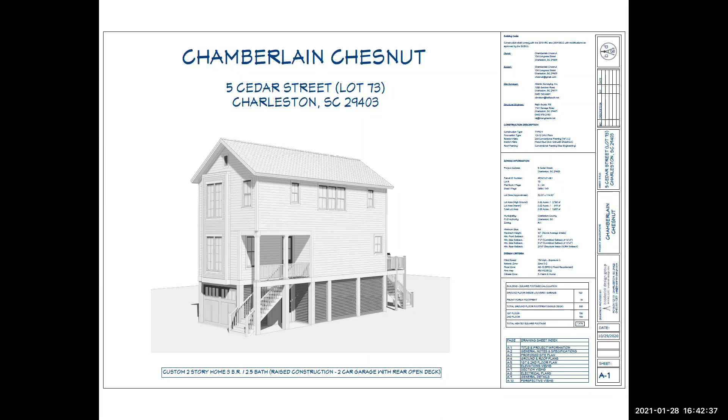Chamberlain, do you perhaps want to go through the slides with us? Sure, absolutely. Just tell me when to advance. You go ahead and advance.

So as you see, looking at the rear of the property, the marsh is all in the backyard, so there's that OCRM line. To the right of the property it says part of lot 74, City of Charleston. There's actually a large drainage canal that runs through that, so Lee Batchelder said that lot is rendered unbuildable. So my lot is actually the last buildable lot on the street. Everything around it is pretty much either vacant land, and there's about 25 townhomes across the street that are 2-story and have been flooding out. The neighbors are trying to band together to see if they can raise up the whole entire townhouse compound, because it floods so bad, about a foot deep in the street.

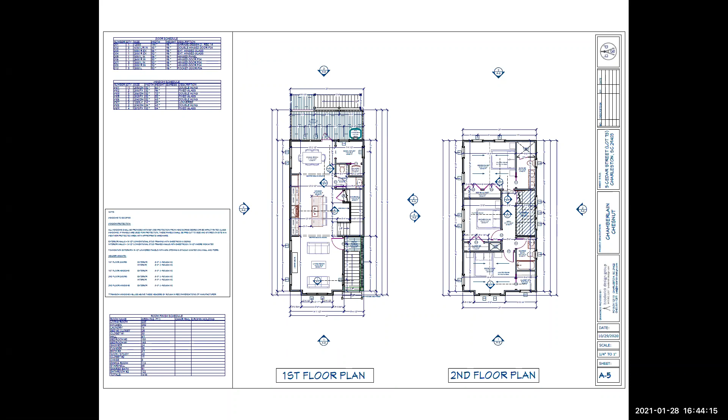So in the front elevation, I always think it's going to go with regular James Hardie plank, but I could always switch to an Artisan siding to give it the thicker look that the historic district would have. And I can go with the 5V roof or standing seam roof, whatever the BAR wants to see here. However, it would be the only house in the neighborhood with all these architectural details, because all the other homes don't have that, but I would be happy to do whatever you guys recommend. That's all I have for you.

Board members, do you all have any questions of the applicant at this point? I have one. Mr. Chesnut, can you just spell out for us the flood zone that you're in and the required first floor elevation? Yes, so it's currently AE 13.

My benchmark is set about 5 to 6 feet above grade at the telephone pole. So I already lose a full story with the flood zones. I have to be 2 feet above the base flood elevation. So the current just adopted flood zone is AE 13, correct? It's AE 13, yes, currently with the new maps. So your finished floor has to clear 15, correct? That's correct, yes. Thanks.

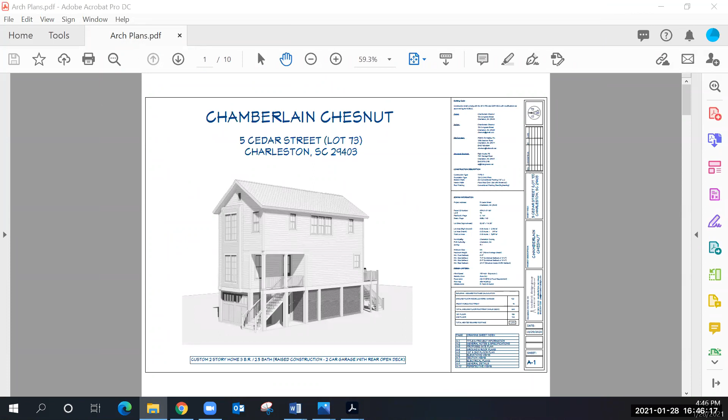Sorry, I'm pulling it up. It's on the elevations. I can't read it, but I'm going to tell you right now. Each floor height's only 9 feet with a 14-inch truss in between. So your garage level, that's a 7-foot garage door. So from grade to the bottom of the floor structure, it's going to be 9 feet 4 inches. To the first floor elevation will be 10 feet 8 inches. To the rooftop, it's going to be 37 feet 9 inches from grade, so just under 38 feet.

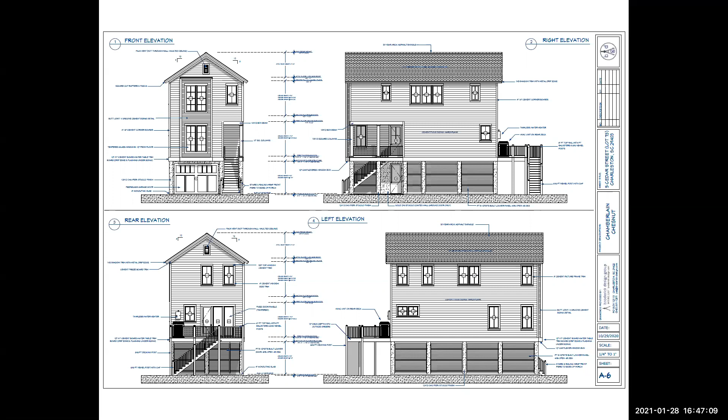Okay, so on the first habitable floor, what's the ceiling height? And then the second floor where the bedrooms are, what's the ceiling height? 9 feet and 9 feet as well. We tried to make this building as short as possible. Thank you.

There are no other board questions. We'll now hear from the public. I don't think we have any public comment. Okay, nope, we don't. No public comment, Kim? That's correct. Okay, now it's time to hear from staff.

We'll move on to city staff comments and their recommendation. We have several comments, but first, want to discuss this property is outside of the jurisdiction of the BAR. However, per zoning ordinance, this parcel must be reviewed by the BAR for the additional half story that's requested. This lot is a unique outlier in that due to the context of the street and the fact that half of the lot is undevelopable, we're in support of the request. It's important to note that the BAR does not believe this project meets the architectural merit test for any architectural elements, style, materials, or detailing, but rather the context of the lot makes it otherwise unreasonably undevelopable. This doesn't set precedent in the Old City District, the Old and Historic District, Landmark Corridor, Historic Corridor, or even the demolition purview, but only in the very unique situation that it presents.

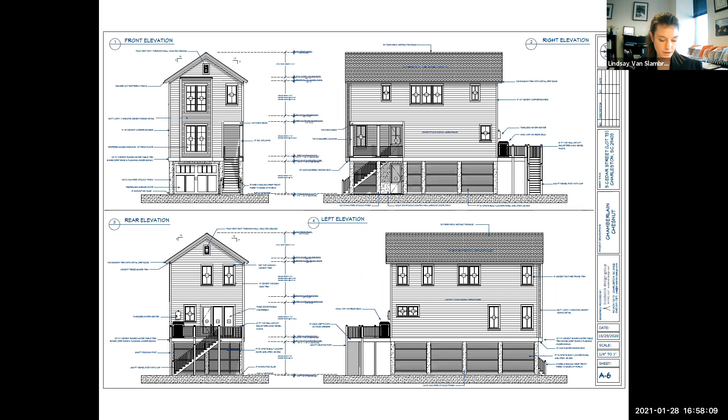All right, moving on. Agenda item number 3 has been deferred, so we'll move on to agenda item number 4, 250 Rutledge Avenue. And Kim, I'll move to you. Thank you.

Item number 4 is 250 Rutledge Avenue, requesting conceptual approval for a rear addition to an existing duplex. The house is a category number 4 in the Cannonborough-Elliotborough neighborhood, circa 1895, in the Old City District.

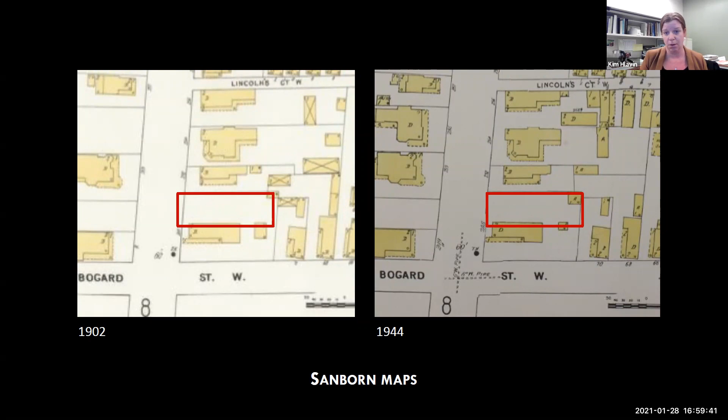You can see that the piazza is facing the wrong side, which gave me pause. Here's another image, a 1980s image, not quite sure how old, same era. In doing Sanborn research, I noticed that the building is not there in 1902, or in 1944, or 1955.

With some help from Kevin Eberly and some sleuthing, we determined that it was moved to the site in the 1960s, moved from further up on Rutledge at 501 Rutledge for the construction of the crosstown. So it was 277 Rutledge before the address was changed. 501 Rutledge was the last address before the crosstown came in.

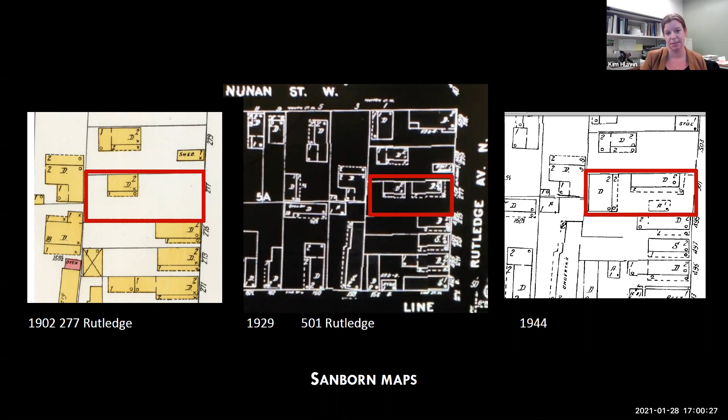You can see it there in 1929 and 1944, it had a front porch on it. So Kevin's suspicion is that it was built between 1902 and 1929, guessing probably 1910 to 1915 era. Here are some photos of it currently, where it was, excuse me, at 501 Rutledge.

Pretty cool, huh? And I will turn it over to Neil Stevenson and Amy K. Stoney. You have the floor whenever you're ready.

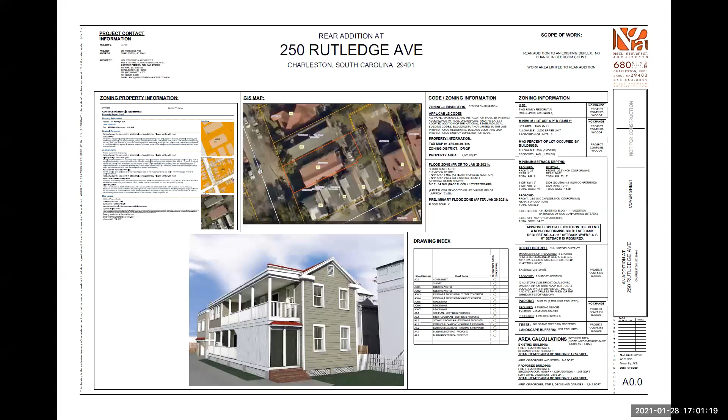Hey, sorry about that, I forgot to unmute. Can you hear me? Yes. Awesome. Okay, well thank you, Kim, for that introduction.

We have the challenge we have. This project started—our client, who's owned this house for a number of years, has an investment property now and wishes to move back into the second floor.

Actually, Kim, could you advance to the floor plan, please? It's shown as a 3-bedroom house, but it's just a poorly laid out floor plan. Actually, on the third floor, like the 3rd bedroom—oh, actually, could you go to the 2nd floor, please? The 3rd bedroom is that porch infill, which is really horrible, and the kitchen is really bad.

So what he would like to do is make this more livable. And as you can see, the house is really short. We're not in a flood zone, so there's no interest in elevating the house, but we've run into some real height constraints in this rear addition.

We wanted to make the bedrooms a little better and then create a real kitchen-living area. He wanted to have some private outdoor space, which we thought we could probably squeeze out of a little roof deck. The whole addition is about 70 feet from the street, so it's minimally visible, but we're trying to stay respectful of the main house. Being that it's so short, it's been kind of a compromise getting some head height.

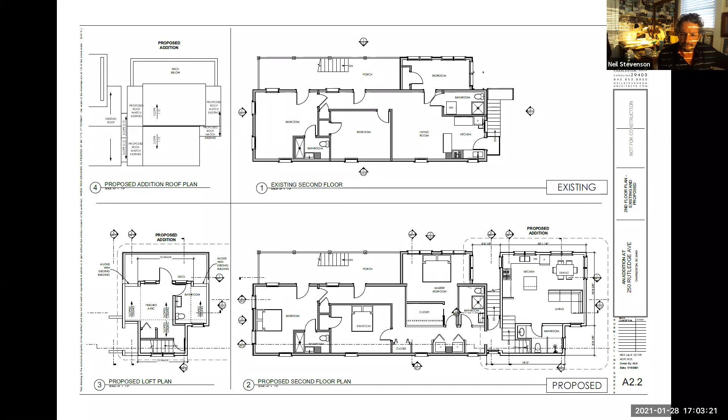As it is, we're keeping the parking as is, there's no change in that. But the parking head height is like 7 feet. Then you get into the addition, and we have an 8-foot head height in the kitchen and dining living area, which is acceptable. But we're really just trying to squeeze to get a little more space so that he can have a little roof deck and a little family room living area that you could step out onto the roof deck on top. We've talked to the neighbors on Bogard Street, who were originally concerned about that.

So we moved the porch—if you want to go to the roof plan, you can see in the bottom left where we moved the porch so that it's completely facing the north part of the property, to help block that so that there wouldn't be any loss of privacy to neighbors.

But let's see if we could advance to, there's a section which shows the front elevations relative to the other houses on the street. Well, here you can at least get an idea.

We created a little hyphen to make the differentiation between the new building and the existing. And we're so squeezed with space. I know the historical groups would like it to be a little lower than the front house, and it might be able to take another inch or two, but we're so squeezed on the height. It's so far back, so we kind of like to just make that hyphen our differentiation and then try to hold that ridge height if we could.

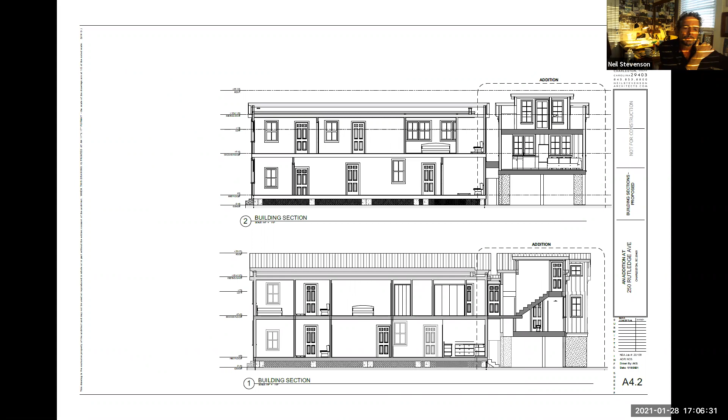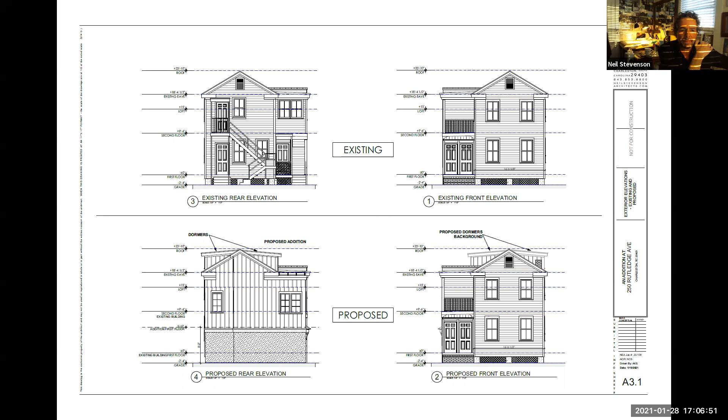And if you could roll backwards on this, that would be great. And see, or actually, if you could go forward and see if we could find the section through. There you see that. So if you could move forward further, please. Let's just see how, what would you like? Oh, I'm sorry, if we could roll towards the front of it. I mean, I should say backwards in the slides, so that we can see a better image of the addition.

Elevation or plan? There's a little computer model that we drew. There you go. That's showing from Bogard Street what you would see from between the houses. And that's a view from Rutledge along the back side of the house. And if you take it one more, we'll see there's to the front of the house. We've tried to kind of keep the lines straight.

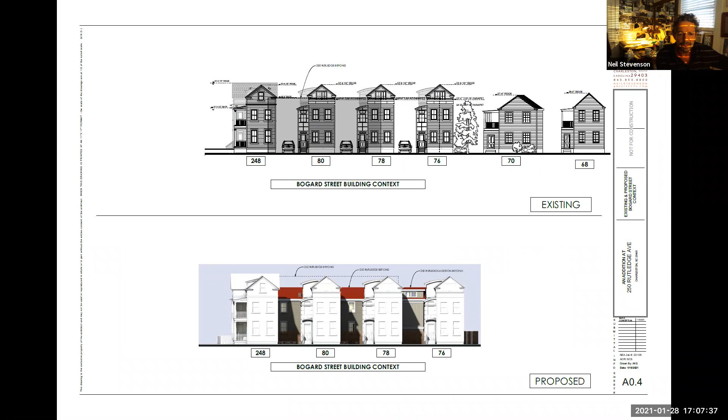And this is showing, this elevation is good, this shows Bogard Street and then the relation with this house. And then I think the next slide is from Rutledge, and you can see 250 Rutledge, how much smaller, how much shorter that is than the other. So it's not so much a mass problem on the street or with its neighbors, it's really just struggling with the existing house and trying to make it work. And being that it's so far back, we're hoping that is acceptable.

Are there any questions? Yeah, I do have a couple quick ones.

You're proposing no door on the garage, is that what I'm seeing? Correct. And the plan is clipped at the back corner, is that because of some kind of setback anomaly? Yes.

All right, cool. And then was there any, did you guys discuss at all like the possibility of maybe removing the stair on the piazza and opening that up, or correcting the piazza screen, or any changes or improvements to the front house? I know, that would be nice. Unfortunately, that was not discussed at all as part of our program, although I totally agree that would be nice. Thank you.

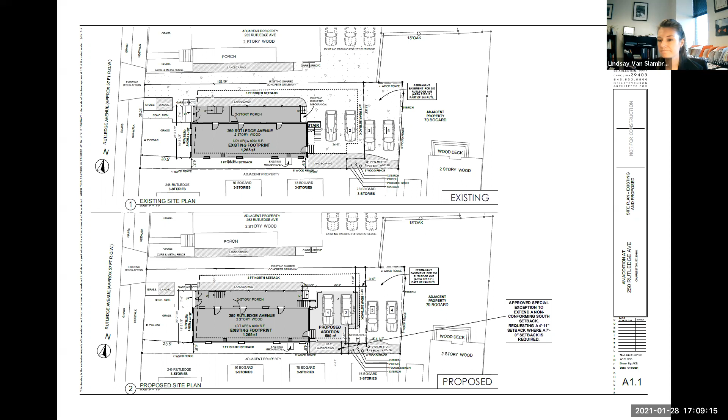Are there any other questions from the board members? All right, hearing none, we'll move on to public comment. Do we have anyone? We do.

Anna Catherine Carroll has the floor whenever you're ready. Thank you. Anna Catherine Carroll with the Preservation Society of Charleston.

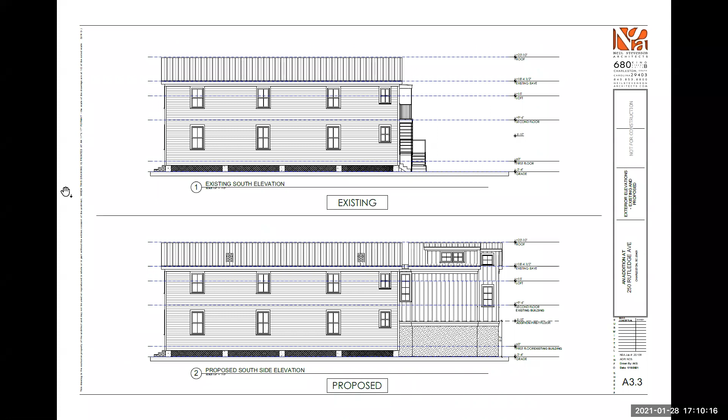The Preservation Society appreciates the applicant reaching out to us on this request and responding to our feedback. However, we remain concerned with the relationship of the proposed addition to the main house, which is not properly subordinate. The proposal to park under the structure is driving increased height of the addition, and the proposed shed dormers introduce too much mass for a gabled roof. So we would ask that this request be restudied so that the addition may more sensitively relate and be more subordinate to the main house. Thank you.

And April Wood. April Wood, Historic Charleston Foundation. I first want to compliment Kim on her sleuthing. I did not catch that.

HCF has reviewed the application for conceptual approval for the rear addition to the duplex, and we appreciate the applicant reaching out to us regarding the proposed designs. While we understand that the height of the building is shorter than typical, we are concerned that the proposed addition is not sufficiently subordinate to the historic structure. The ridge of the new addition should be shorter than the ridge of the historic structure. We recommend restudy of the height before moving forward. Thank you.

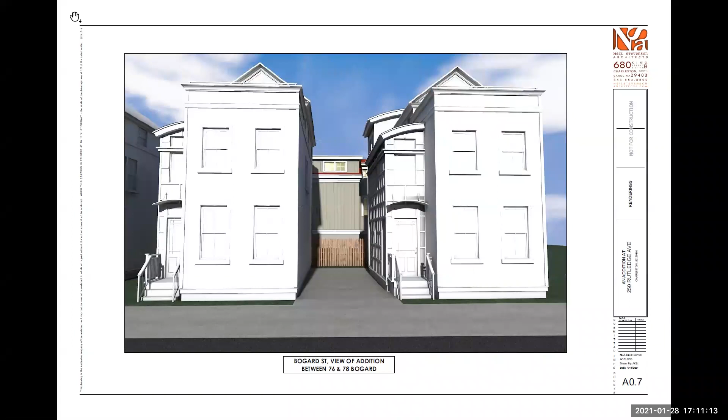And is that all we had for public comment? It is. Okay, we have heard from the public. Now we will move on and hear from city staff.

Kim, just a couple comments. The guiding principles of Charleston's zoning ordinance require additions to be subordinate in height, scale, and mass to the primary historic volume. This proposal warrants restudy so that the historic spatial relationships are retained. The proposal has several elements, such as the dormer windows, volume width, siding material, and roof deck, that can be modified to better relate to the existing building. Staff is recommending denial for height, scale, and mass, and for general architectural direction. Thank you.

Thank you, Kim. Having heard from the public and hearing staff comments, we'll go back to the applicant. Mr. Stevenson, did you have anything to clarify or respond to? No, I think we've got the challenges that we're faced with. We couldn't reduce any of the parking, and we're just trying to create a better living condition for our client. I think that we could probably lower the roof up a little bit, just to try to make the addition more subservient. It's just we're faced with some challenges here that's hard to get around.

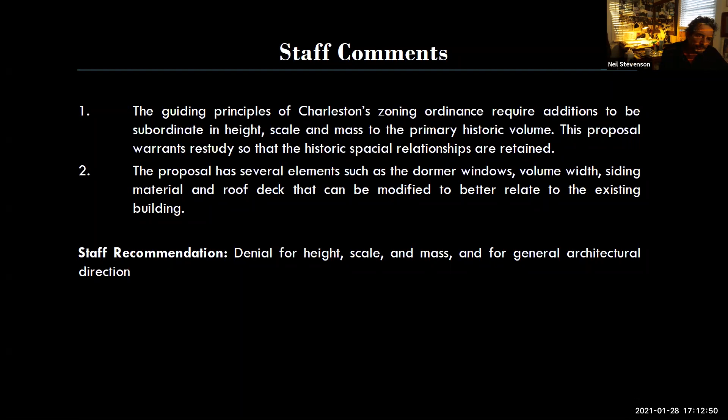Okay, we'll now move into board discussion. This is Bill. I guess I'll go ahead and start.

I mean, I think it's a well-conceived design, except I do have a problem, the same as has been stated before about the subordination of the addition to the main house. So I believe staff comments are correct, and the comments of the preservation groups as well. But I do think some of the detailing vernacular that started here, if it's carried through in a more appropriate way, would be a good addition to the building. Thanks.

Glenn Gardner, I kind of echo Bill and the preservation groups and the city. I think that sometimes a house just isn't large enough to support an addition that you want. And I think this is the case here, where this building, this home, can handle a small addition, but the requested addition to me appears to be almost beginning to gobble up the house itself.

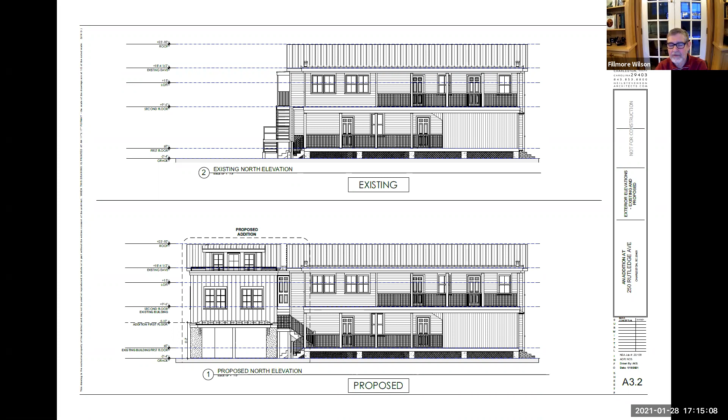Yeah, so I guess I'm with the others. Fillmore Wilson, I don't really have anything to add. I am in agreement with my fellow board members and the preservation groups and staff on this one.

Okay, I will make a motion just following staff's recommendation for denial, for height, scale, and mass, and general architectural direction. All right, we have a motion on the floor from Julia. Motion for denial for height, scale, and mass, for general architectural direction. Do we have a second? Fillmore Wilson, I'll second. Thank you, Fillmore. All right, we will put it to a vote.

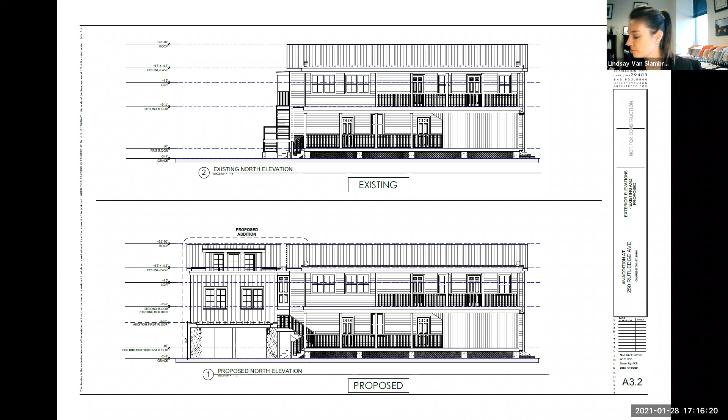Glenn? Yay in favor. Fillmore? Yay in favor. Julia? Yay in favor. Bill? Yay in favor. Chair votes with the majority, and the motion carries unanimously. Thank you for your time.

All right, moving on to agenda item number 5, 234 Ashley Avenue.

234 Ashley Avenue is requesting final approval for a paint color change to Inkwell on the main body. The building is a category 4 in the Cannonborough-Elliotborough neighborhood, circa 1855, and in the old historic district. Here's an aerial image showing you the location, just north of Spring Street on Ashley, about a block from South Ave, just in case. Here's some existing site photos, the house in question, and looking south on Ashley, north.

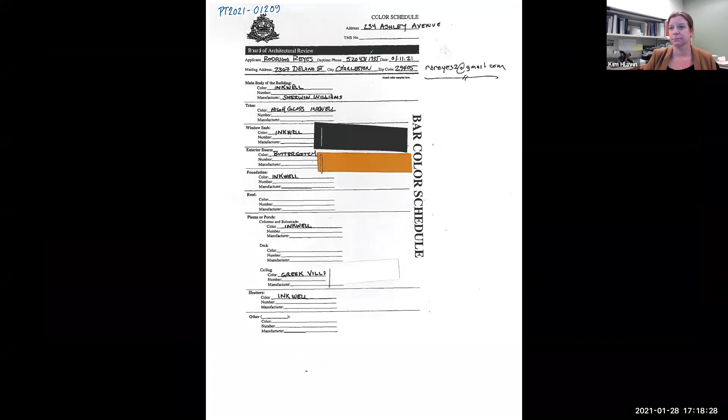Hello? Hi, okay, sorry, honestly this is my first attempt with Zoom, so forgive me. Kind of old school, just did FaceTime during the pandemic, so my apologies. The clients here at 234 Ashley, we kind of got inspiration to change the home from some images we saw of this home in the Northeast, because they're originally from New Jersey. It was all painted dark. We kind of just thought they wanted something different than the standard.

So we wanted to take the yellow and put it onto the door, which is that butterscotch color. And then take that black—but it's not black, Inkwell is more like a very, very dark blue—and do that as the body. We kind of fell in love with that.

Initially, the thought was doing all of the trim in Inkwell as well. We painted that, but in reality the contrast with the Greek Villa trim, which was also painted there, was probably a better choice. We don't have much beyond that—we just fell in love with this color, and the homeowner really loved it.

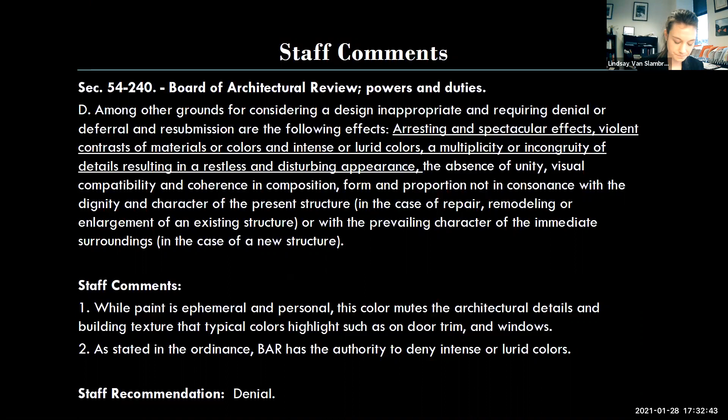All right. Moving on to agenda item number 6, 1 Michel Place. Just one moment.

Item number 6, 1 Michel Place, is requesting conceptual approval for the elevation of a historic residence. The building is not rated in the Harleston Village neighborhood, circa 1888, in the old historic district. Here's an aerial image showing the location tucked back on Michel Place, and a view from Queen Street where you can just barely see the house next to the cypress. That's all I have for context. If the applicant wants to take it from here.

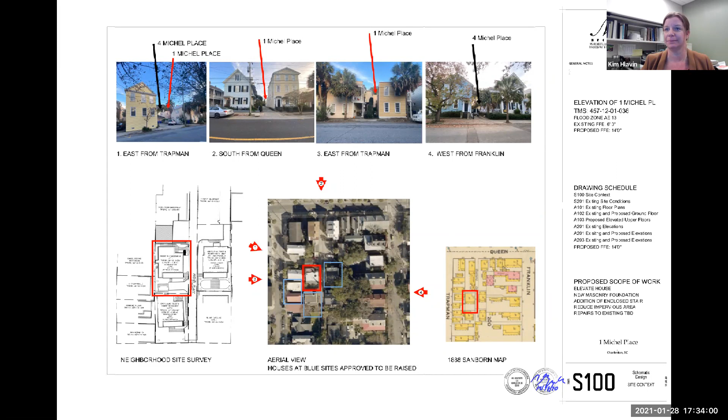Ms. Maybank, you can go ahead whenever you're ready. Oh, hello. Can you hear me? Yes. Thank you. I just wanted to give you a brief overview of what the owner is hoping to accomplish.

He has a house on this small street where there are four similar houses of a similar age, and he's had a lot of trouble with flooding, so he's looking to raise his house. He has applied for and had approved his application to FEMA for funding to help with the expense of raising the house. To pursue that, he must get your approval. He doesn't have a whole lot of complicated desires other than getting the house up and raising it to continue to use the house the way he is using it.

This is an aspect of the house that's a little different from the other houses on the street. There are only four houses, but access to the second floor of his house is only from the street at this point. So he'd like to maintain the use of his house as it is. In raising it, he'll need stairs from the street to the first floor, and also to the second floor.

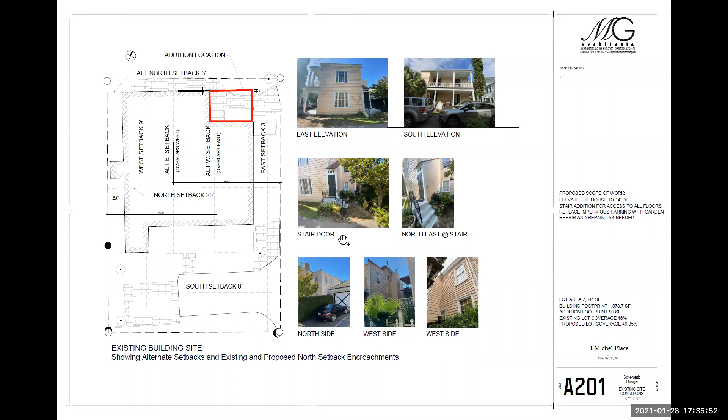So if you keep going, you'll see what we're proposing, which is that we put the stairs together that he will need to get from the ground floor to the first floor and continuing up to the second floor, all in the same kind of location, pretty much where it is now, except it expands because more stairs are needed. In order to do that, we'd be expanding the footprint of the piece of the house on the north side.

Architecturally, the house has got an apparent main body and an apparent addition. The history is that the apparent addition was actually there all along, but it is lower, even the second floor level is lower. So it just has this quality that it's kind of an addition. The simplest and most natural way to increase this house would be to just extrude that, make it bigger, and continue to express it as the same kind of piece that it is now.

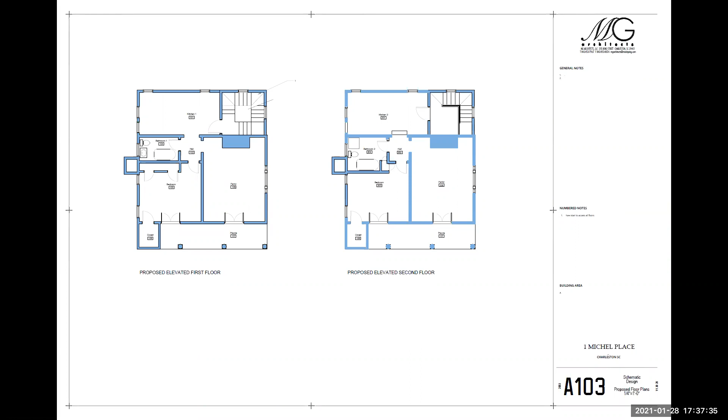If you would keep going with the drawings, you will see the existing plans, and you can see the little strange staircase coming in on the second floor there and going up. If you go to the next, you'll see where we're going with just trying to make a staircase that keeps going on up to both the first and second floors. The next sheet shows the existing elevations.

He's not really proposing to change a whole lot more about the house. The original windows have a kind of 9/9 pattern in the main large windows. He'd like to put those back and pattern the new windows into the addition on that same arrangement of mullions and panes, essentially taking his cues from the existing house.

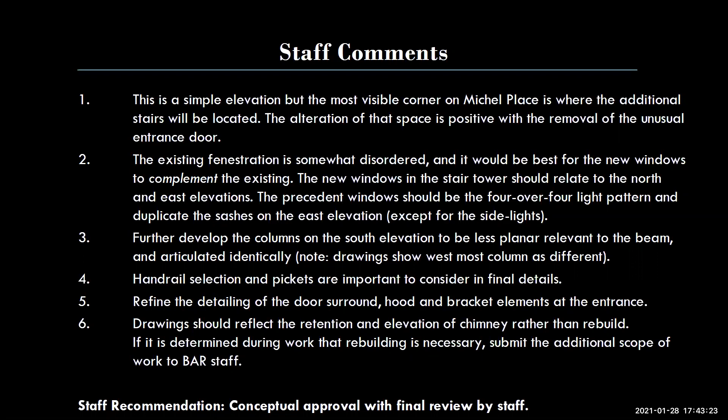No, I thank you all for your comments and I agree with them. The only thing would be the issue of the precedent windows - I would ask that staff maybe take a look with me at what are the original windows on the building. The owner replaced some of the sashes with windows that he built himself. The originals were not the 4/4, but were the 9-pane sashes. So I'd like to work with you all on what you think the most appropriate resolution of that is, since that's part of your comments.

We'd like to just go over that with you and get you all comfortable with whatever we end up with. Thanks for that clarification, Ms. Maybank. We will now move into board discussion and a vote.

This is Bill. I can jump in on this, but I was just going to say that I agree with staff's comments and recommendation. I appreciate the thoroughness of your comments, Kim. Thank you.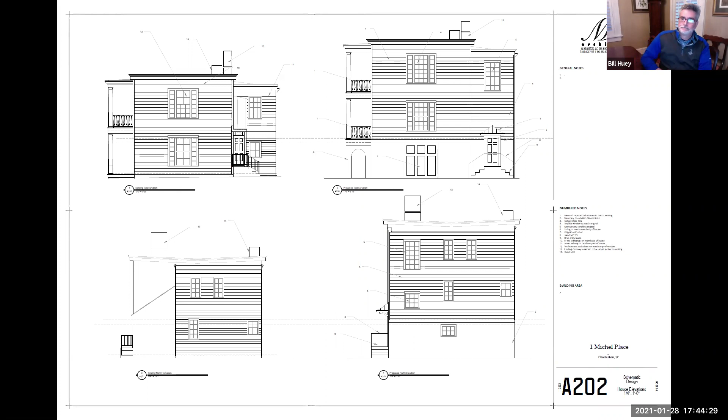Julia, I feel like this solution to the design problem looks pretty good, and I know this was tricky to figure out because of the quirky, unique existing conditions. My one suggestion, in addition to everything staff has suggested, is that where you're filling in that corner, maybe you could consider retaining a corner board on the north elevation just to demarcate that as being altered from the original building geometry. That would be a thought. Otherwise, I agree with all of staff's comments, maybe with the exception of number 2, because I see what Ms. Maybank is saying about the 9/9.

Fillmore Wilson here. I'm in agreement with staff and with Julia's comment. It looks like the issue with the fenestration can be worked out by determining what is precedent and original and what is not. So I am in line with staff's recommendations and comments, and I think this is a very successful way to elevate a rather unusual structure. I agree as well.

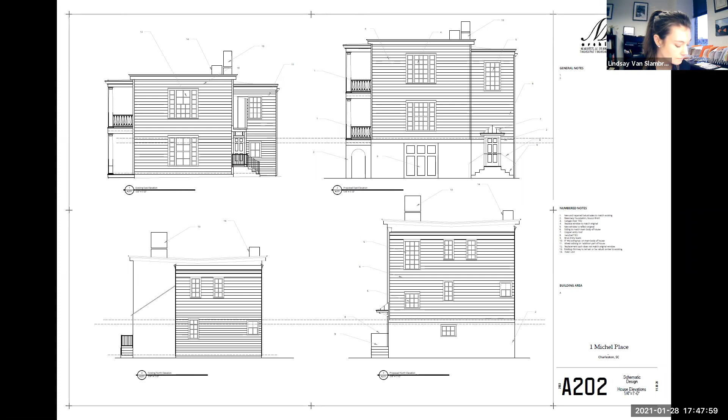All right, we will now move on to agenda item number 7. 5 Glebe Street is requesting final approval for renovation, including modifications to entry steps and ramp, Category 2, in the Harleston Village neighborhood, circa 1840, in the Old Historic District. Here's an aerial image of the building on the west side of Glebe, just north of Wentworth Street and south of the college, and some existing site photos looking south on Glebe and north on Glebe. Here's some historic images, courtesy of HCF, 1977 to 79, and then a 1973 survey card image.

And the applicant's here, Mr. Beckham. You may begin whenever you're ready.

Mr. Beckham, you may be on mute. Mr. Beckham, we cannot hear you. I see you're unmuted now, but maybe you could call in instead. Mr. Beckham, we are still not able to hear you. Kim, I know we had this issue in the last meeting, and I believe we tabled it and moved on. Yeah, that's right. You tried doing that? Okay.

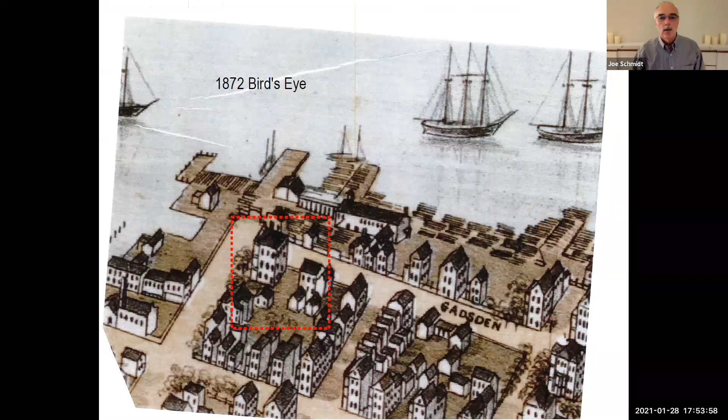And if you want to click through these.

So that's 4 Gadsden, you see it there. That is not the size that it is now, it has grown from that. You see they added a piece onto the end of it. The porch is not original. The house itself was only about half of what you see across the back of the lot, so it's been added on to three times.

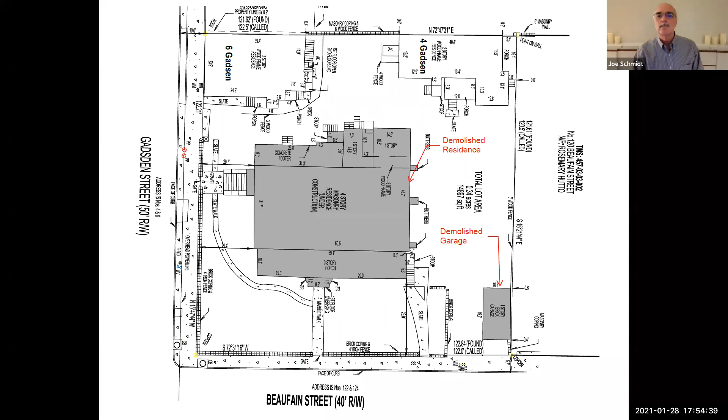If you click on... the house has some foundation issues. The original house that was torn down had foundation issues, so it only makes sense. We're going to need to put new foundations under this residence.

The decision has been made not to request a historic exemption, but to go ahead and raise this structure up, because this is a low area of the city. We are going to take it up to the height that FEMA requires. We're not going any higher than that.

If you'd like to click through some more, you can just keep going through these and get the idea of the condition. You'll notice the base of the house was brick, so in our proposal we are electing to put a brick base under this house also.

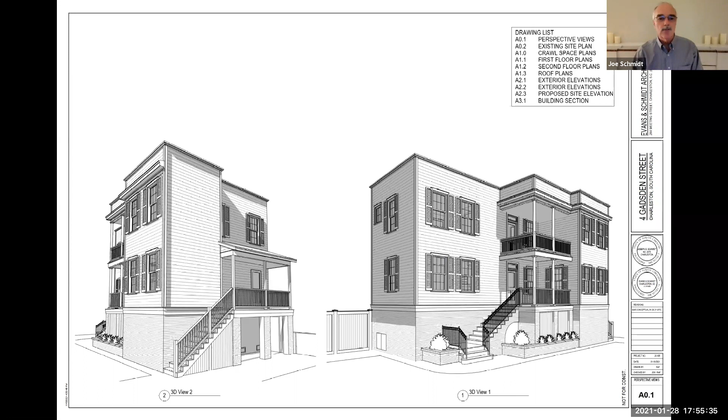Just in the interest of time, if you want to jump to A 2.1 - there you go. What we're going to be doing is lifting the house per FEMA to the height that's required. We are removing - if you see on the far left-hand side of the screen where it was a duplex, there were two doors going in, one went up a stairs, one went in off of the porch - we're getting rid of the door off the stairs. None of that's original to the original building. The stair was, but not the door or the surround or the steps. The proposal on the left is to come in the other door and reuse the porch.

This house, not having a pitched roof, always had a flat shed roof, is very boxy. Our concern was lifting it up makes it even more boxy. So we tried to diminish the scale of the lift by putting in these built-in brick planters at the base of it to help tie the house back down somewhat.

The exterior, everything will be restored on the house - the wood siding. We're going to replace the nailed-on vinyl shutters with operable shutters, obviously. The steps are going to be masonry steps, we'll use wrought iron for the handrails. The porch will have wood handrails and the wood columns that are there. Single pane windows are remaining - everything about it that is on the existing will be on the proposed.

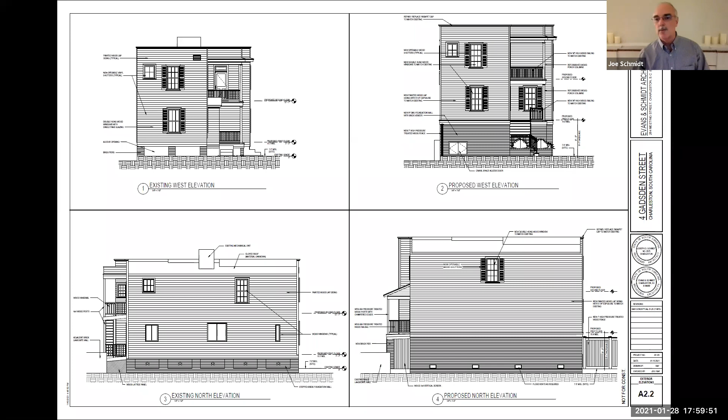Yeah, okay, the maps have already changed - it's in effect now, the new. Right, we've adjusted it either way and have worked with HLA, the civil engineers on this one, as well as the townhouses at 120 Beaufain. So.

Do we have any other board questions right now?

All right, hearing nothing else from the board at this time, we'll move on to public comment. Kim? We have no public comment. All right.

We will move on to city staff comments and recommendations. Several comments: add niches under windows at south elevation. Shutters must be operable, so add some hardware please. Shutters under porch should be bifolding. Simplify handrail and specify wrought iron. West elevation crawl space door should be relocated or centered and detailed and softened with landscaping and irrigation. Staff's recommending conceptual approval with staff comments and final review by staff.

Thank you, Kim. Mr. Schmidt, did you want to respond to any of these comments or clarify anything? It looks like everything we're already doing there. I'm not sure, can you expound on niches? What are we talking about? Something similar to what you have proposed for the front of number 6 Gadsden, just to dress up that foundation wall. Oh, in the foundation. Okay, in the foundation, I thought it meant under the windowsill. Oh, gotcha, correct, very good. Yeah, we can definitely look at that. That's fine, to avoid a blank foundation wall. Correct. No, we're fine with working with all of that.

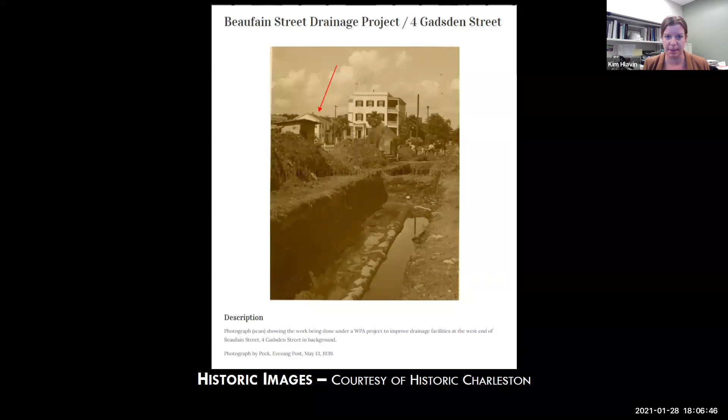Okay, at this time we'll move on to agenda item number 9, which is 6 Gadsden. 6 Gadsden Street is requesting conceptual alterations to the existing building, including elevation for FEMA requirements. The building's not rated in the Harleston Village, constructed pre-1902, and in the Old Historic District. This building sits just to the west of the previous building we looked at. Here again is the corner looking northeast, and this is an old photograph of improvements they're making, the drainage facilities, and you can see the house back there from 1939. And Mr. Schmidt, you can have the floor.

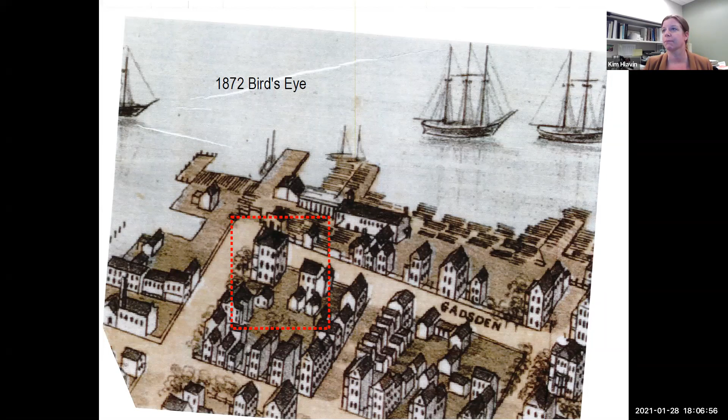It was built as two apartments, one over the other, hence the two separate entry door systems. The building is classic for that time period, built as downtown surplus housing for Navy base workers, with one large bedroom, one small bedroom, a small kitchen, a small dining area, and no living room. You got up, went to work, came home, and went to bed.

Hence the front elevation has that look—it's offset. You notice the windows are not centered because one bedroom had a double bed and two windows, while the other bedroom had one window.

For years I drove by this house and assumed it was a porch infill incorporated under a gable roof. That's not the case—the way it's framed is exactly the way it is. In fact, all the materials inside are from that same time period. There's no sheetrock, no plaster—it's all that mineral board used during World War II for Army bases.

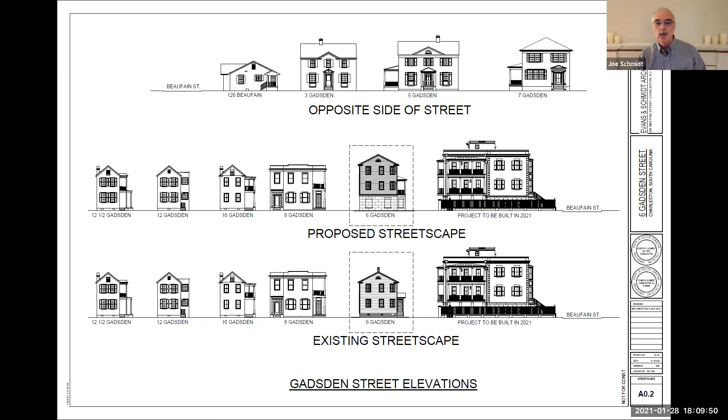If you'd like to skip to A2.1. When we did the townhouses on Beaufain Street, we realized this house needed some help.

The reason that little appendage is on the bottom of the building, on the bottom left-hand side, is that the door in the middle of the building goes straight into the first floor apartment. The other door is 90 degrees to that, and the way it's framed, the stair is on the face of the building itself. So if it wasn't for that, you'd open the door and immediately trip on the first step. We knew we had issues to deal with.

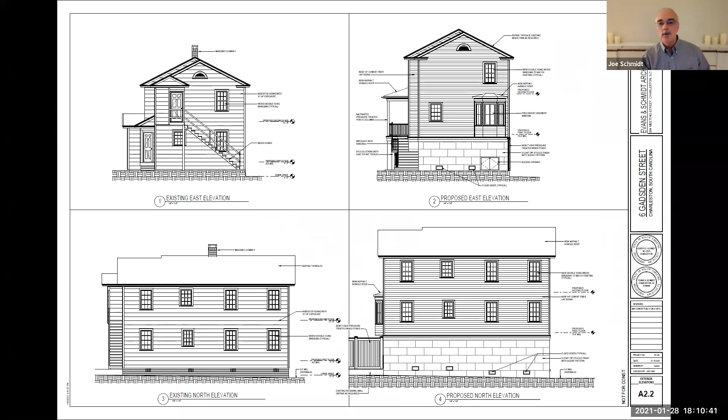We reserved some space in the site plan to add this porch feature, giving this house a better look. We knew we'd be raising it, and we thought that idea would work well.

We ended up, even with that, having to turn—you see on the top left there—the way I'm talking about where the stair is. As it turned out, we still couldn't make it work, because for the height of the house we couldn't get out the front or back without being in the sidewalk or street. So we finally had to turn the stair inside the house and reframe it.

That being said, this house never had a street door entrance. With the height issues and the fact that this is part of a compound with 4 Gadsden and the 4 townhouses on Beaufain as one-site compound, we decided it wasn't appropriate to have that street door. It was too narrow, and we couldn't get the steps to it. Also, the height isn't high enough to fit a door at that level—so it's not a full entrance, we just couldn't get a door in at street level.

So what we chose to do was put in a nice set of steps on the back, again using wrought iron to give some mass to those steps, not just plain wooden steps. This will become a single family house, as will 4 Gadsden—both are going from apartments to single family.

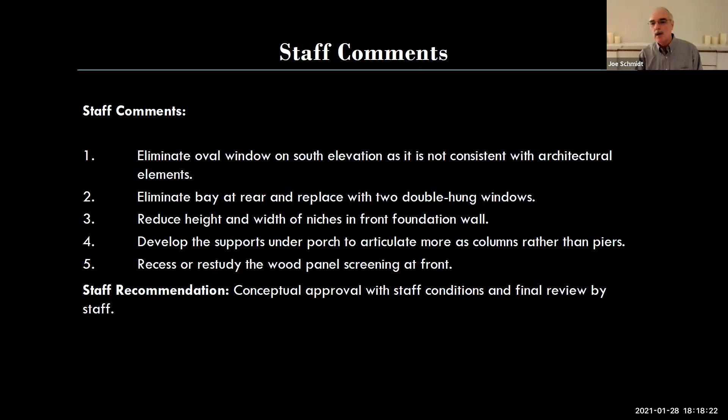We really like the bay window and the oval, but we tried to add something to this house to give it its own individuality. When you say the wood panel on the front, I think we don't mean the street front. Is it under the porch? Yes, the foundation screening. That was actually recommended by both of the boards. We had solid stucco indent panels before, and they both suggested that, but we'll work with staff and figure out what staff is talking about.

I think it's just a lot of wood right there at the front. Maybe there's an extra beam added to the top. There's a sill inserted above, below the wood paneling, so it kind of anchors it more, just to soften it. Okay, well, we can work with you. Thank you.

Thank you, Mr. Schmidt. Let's open this up for board discussion and vote. Let's see, what do I think?

I think I am at peace with the proposal to use narrow board HardiePlank on this, given the conditions and the evolution of this house. I'm okay with the removal of that utilitarian chimney, and personally I don't really have a problem with the addition of the decorative elements of the oval window and the bay window. They won't be very noticeable from the public right of way, I don't think. And I personally feel like they're reasonable given the entirety of the scope of this project.

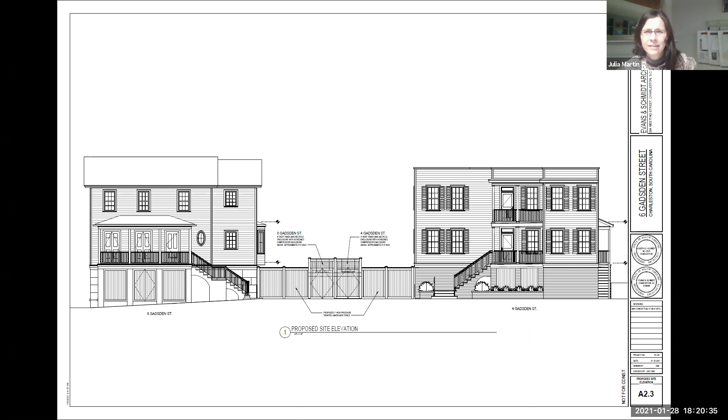My one concern remains, like with the previous application, that if you look at the very last page where the building sections are, it indicates this is an AE 11 zone, and they're requesting 2 feet and almost 5 inches of extra height to accommodate ductwork below and get the framing and ductwork both above the elevation that FEMA requires. So I'm going to keep that position like I had with the previous one: that should be brought down.

This is Bill, go ahead. I agree with staff's comments and several of Julia's comments as well.

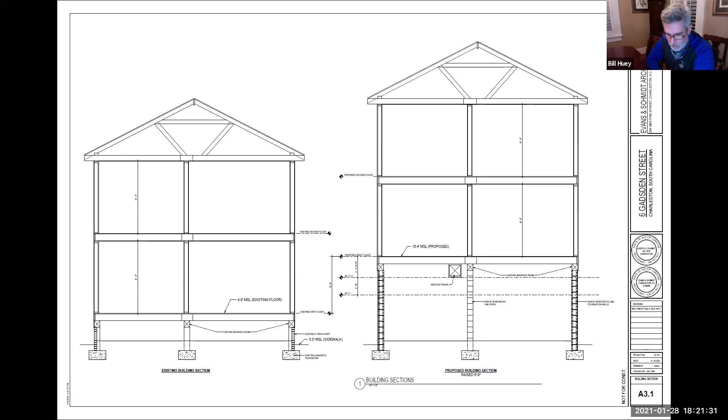I guess the one thing, maybe because of the good story you told Joe about the Navy Yard people coming and working and flopping in at night, and that was their life there, I started to get the notion of the window fenestration being odd, suiting rooms designed for a purely utilitarian kind of lifestyle. It started to tell a little story about this house, and I started to think about that sort of World War II construction and vintage. There's a nice story there, now I don't know how that telegraphs through. Obviously the asbestos siding being original, I do believe it would have been. That changes the character of the whole house.

So in light of that theme, I could definitely understand the siding product and replacement you're proposing; I think that makes sense. The thing I have a little departure with is that the house now has sort of a formality to it. The scored foundation is throwing me off, and some of the heavier arched entry stairs, and then the oval window, kind of give it more of a finished, formal appearance. Then I remember that story about the guys flopping in from working at the Navy Yard, so I just didn't know if there's some detailing that could be more true to that history. I would like to see some of this formality taken down a couple of notches to complement that history of the house. But otherwise, I think you're headed in the right direction with the elevation and what you're doing.

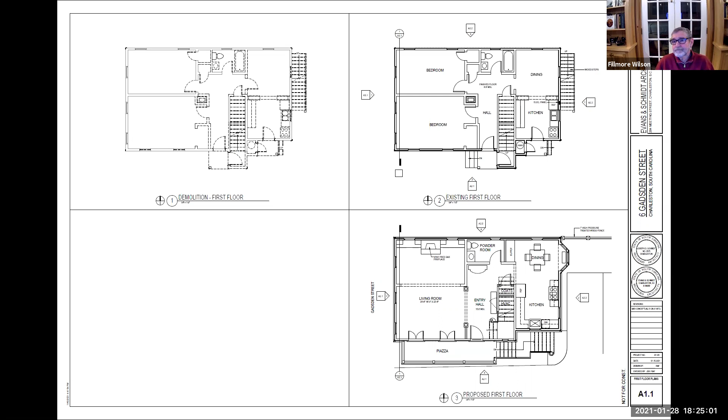I appreciate Bill's suggestions about staying a little more true to the original nature of this structure. Honestly, I think removing almost 2.5 feet from the height of it will lend itself to that, at least to some extent.

So I'll try to make a motion here for conceptual approval with staff comments. Let's do staff comment 1, and a board comment to restudy the foundation treatment at Gadsden Street to be less formal.

And Julia, did you also have the same board comment as on the prior application to limit? Yes, thank you, Lindsay, exactly. So I'm hearing we have a motion on the floor for conceptual approval with staff comment 1 only and 2 board comments: the first to restudy the foundation treatment at Gadsden Street, and a second to limit the first floor elevation to FEMA requirements, subject to final review by staff.

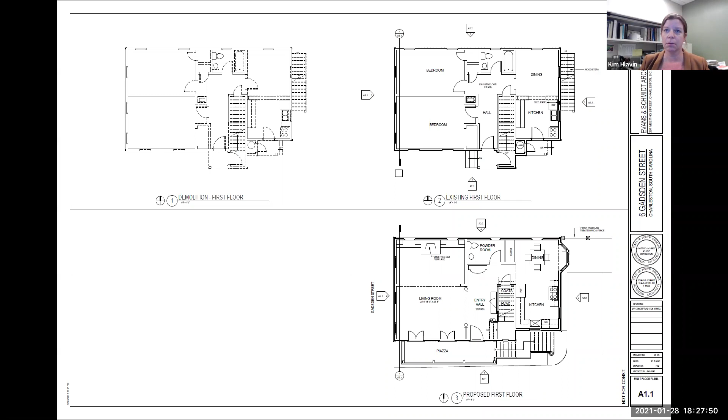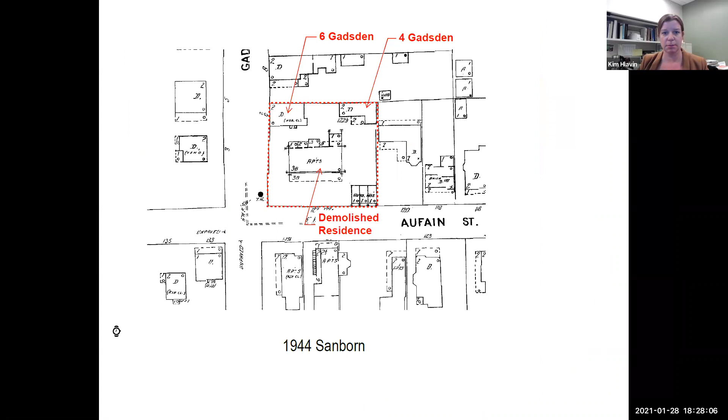Mr. Beckham, was he able to join? Yes, let me get him. There we go. Mr. Beckham, can you hear us? Hello. Mr. Beckham, hello, we can hear you. Glad to hear, and good evening. Good evening, yes, I can hear you.

Wonderful. Kim, I think we should start at the top again with your introduction on this item. Agenda item number 7 is 5 Glebe Street, requesting final approval for renovation, including modifications to entry steps and ramp. It's a category 2 in the Harleston Village, circa 1840, in the Old and Historic District.

Sure, thank you, Kim, and thank you guys for your patience. Again, I am Steve Beckham, and I am the architect on behalf of W.S. Beckham Architect, as well as Mount Zion AME Church.

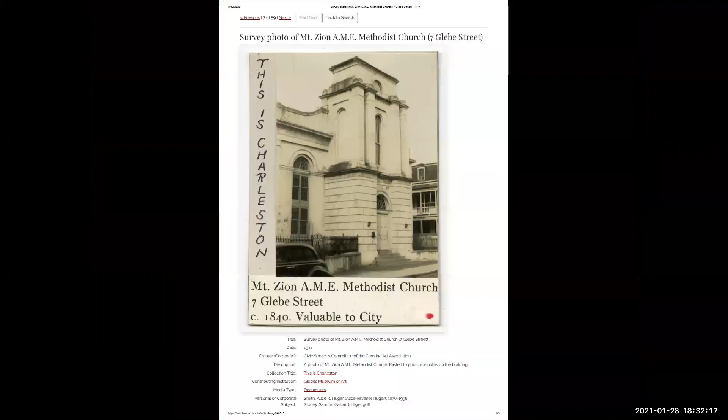And that being said, Kim, if you'll go back to my plan, I'll address the steps, and then we'll get to the ramp. In plan, next drawing please.

So that's kind of our approach to what we propose as far as the renovation. Now, we are respectful of the historical significance of these steps and their components. What we propose to do, and through my correspondence with the city, the church, and some similar jobs in the area, what we propose to do is carefully...

Remove and reuse the existing veneers for both the treads and risers. You can see in the pictures there, it's painted over, and you can begin to see some of the original veneers beneath the painted current surface of the steps. So again, we opt to preserve and reuse existing treads and veneers and supplement with like new material.

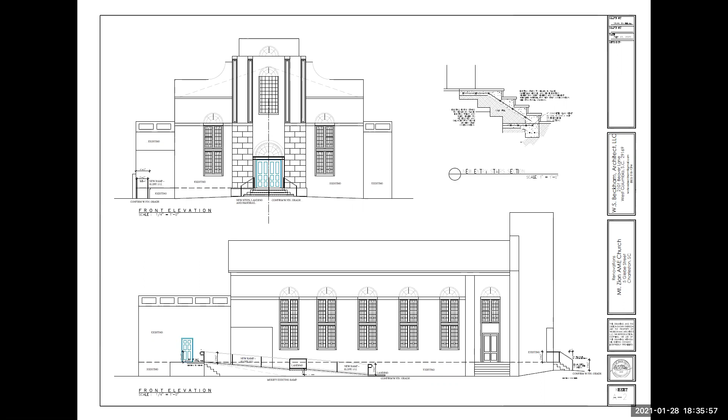One other thing, on a similar note, Kim, if you would scroll back up to the floor plan, please. Yes. Guys, also there's been some discussion about the reversing of the swings on the entry doors. I understand that this has been discussed for some time for obvious reasons. The current entry doors swing in, which is your primary means of egress from your sanctuary.

And again, the reversal of these swings has been discussed, but it presents you with a very awkward situation currently with those doors swinging out now over three inconsistent steps. So you've kind of got an issue there. I understand the comments were made that you don't want to reverse and swing the entry doors in the direction of travel when you would be exiting over three steps before you exit the doors. Make sense?

Hello? I think we've got it. Mr. Beckham, if you have anything else at this time, I'll open it up for some board questions if you all have any.

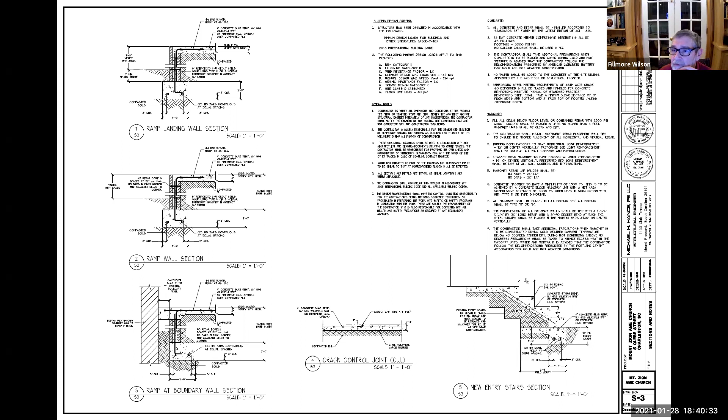Right, I think that's fine. I just noticed your drawing didn't show an expansion joint there where it contacts the wall. You know what, sir? Quite honestly, I had the structural engineer generate these drawings, and quite frankly, I noticed that as well. I would ask for an expansion joint between the new concrete and that garden wall. Yes, sir, thank you very much.

This is Bill. I just had one question. You had mentioned veneers. What is the veneer material? And I know you're reusing part of that for the upper portion of the steps and then adding new to match below. Have you found matches for it?

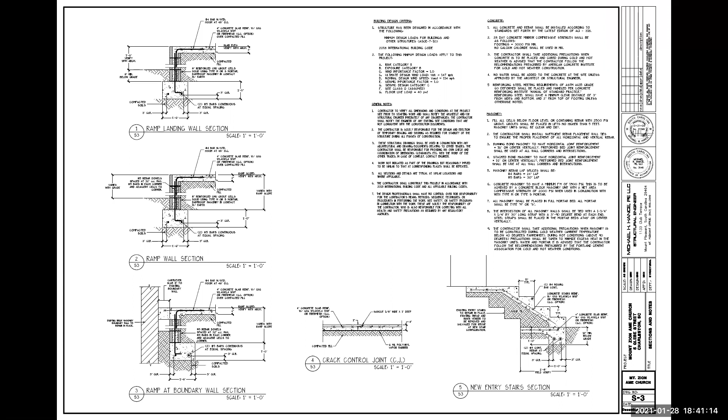Good question, Bill, thank you. Kim, if you would, go back to any of the pictures I provided of the entry steps. Some of the close-ups, you can begin to see the paint or the coating on top of the original steps in some of the areas there. I'm told that this is what's referred to as a brownstone or Charleston brownstone.

We actually met a contractor, a craftsman on site who had done a number of similar projects, both with this brownstone and granite, in some of these areas on some of these types of buildings. And he is the one that informed me that some of this additional material can be obtained.

So again, I can't say we know ideally exactly what we're dealing with, other than I understand it's veneers, and you can begin to see with some of the coating peeling off that there are joints of where these veneers are joined. So again, sir, I understand it's brownstone, and we looked around a couple of the residences and buildings right there on that block, and it's some very similar material.

I was going to ask about that in a similar context, Bill, because I don't think this is veneered. I think it's brownstone slabs that likely began to decay over time and then were covered with a slurry of concrete and repair, and then painted. So I have a little bit of concern about pouring a new set of steps on top of a historic set of brownstone steps, which would likely leach water between the brownstone and the concrete. And I don't think it's how the Secretary of Interior would recommend handling this situation. At the same time, I certainly understand the need for safe access into and out of the building.

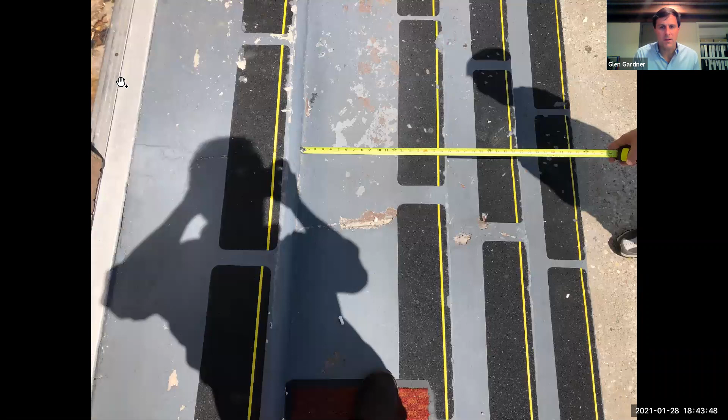And when you get a riser height like that bottom one that is off, Kim, I was going to ask, is there any better photo that shows a little more of the concrete area in front of the brownstone step? Maybe that historic photo. Okay.

So they're painted. Glenn, I respect where you're coming from on that, whether it's veneers or slabs. And again, we're kind of going into it not knowing exactly what we'd be dealing with regards to the thickness, the length of the actual material. So, again, I think whether they're more slabs versus veneers...

And again, they did a very similar project, but with granite right across the street most recently. And it was more of, I won't say slabs, they were more of like 4 to 5 inch thick type. This is right across the street from 5 Glebe, recently done here. So I think what happened over time is the sidewalk has been repoured, and so the concrete has been raised, and that's what has shallowed up that bottom riser to certainly throw things off.

I think once we get into the actual board discussion point, we need to talk internally about what is the correct manner of dealing with a historic set of steps like these and adapting them.

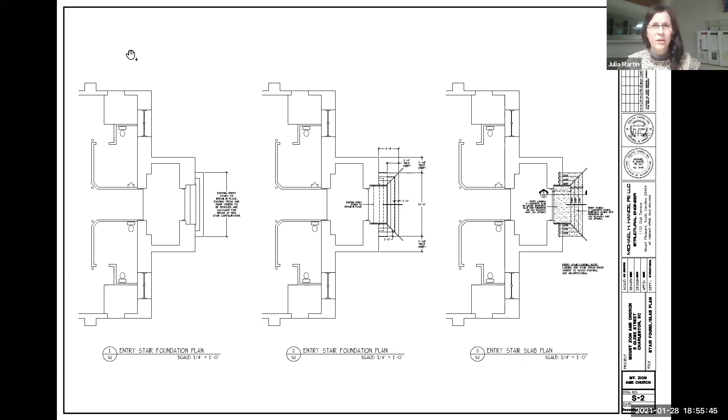Fillmore, I have a question for staff. Part of this application is to reverse the swing of the front doors. Is that correct? That's what it looks like on the drawing. So it's a question, it's kind of hard to tell because it seems like existing and proposed are sort of on top of each other. I can't tell, but that's why I'm asking staff, is part of this request to reverse the swing of the front doors, because the extension, it looks like from the drawing, it's hard for me to read.

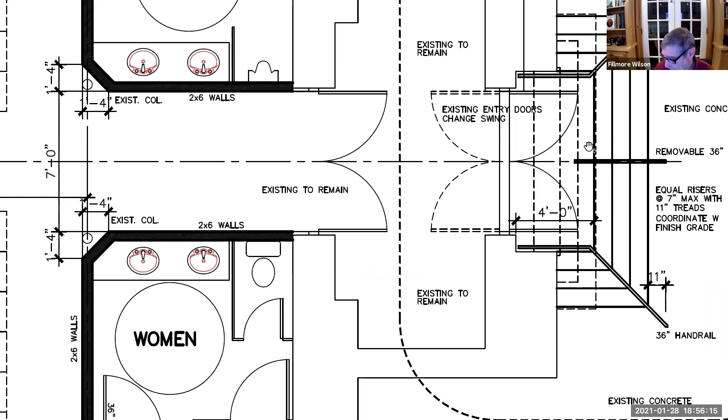I can't get the drawings quite big enough on my screen to really look at them closely, but it looks like part of the extension of the stair would accommodate the reverse of the swing, or would help to accommodate the reverse of the swing on the doors. Yes, let's see, yeah, that's correct. It looks like pulling the stairs out creates a landing space, and it looks like the entry doors' swing has been reversed.

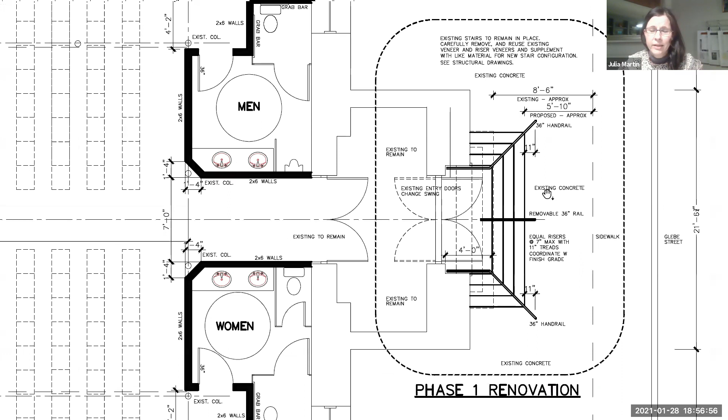All right, this is Julia, and it just seems to me that there needs to be some further review of what is revealed when they are able to kind of see the existing materials. I'm not at all confident that they'll be able to extract that and reuse it. It might be in really bad condition, in which case the goal of greater safety would be compromised. So I don't know if staff is comfortable taking that on, or if they'd rather us go review it at some point, but that seems like the only way to really resolve that question.

But generally, I feel like the notion of adopting that material palette for the new extended stairs makes a lot of sense. I think that would be very respectful. In terms of the iron railing, it sounds like the applicant wants to incorporate code required extensions, and I think that would require working with a thoughtful iron worker who could accommodate that while still maintaining some of the character of the existing elements.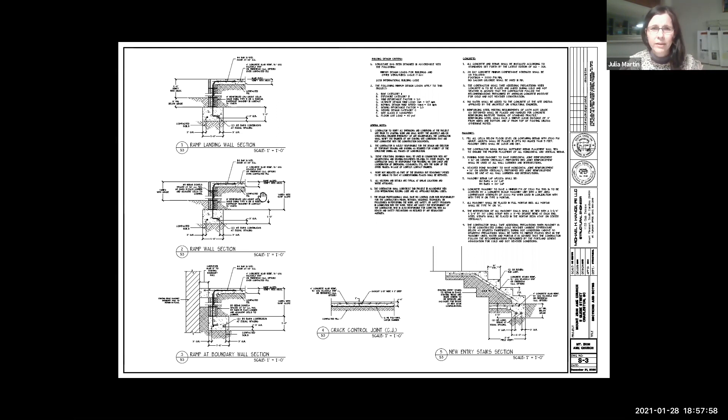And I would just ask the applicant if, for final review, it would make it a lot easier if there were plans and elevations of the existing conditions, which could be easily compared to plans and elevations of the proposed conditions, at least in the areas of work that we're reviewing.

And it's Glenn. I'll echo what's been said, paired with the belief that these are solid brownstone slabs, which are incredibly difficult to extract and reuse. So if the city is willing to sort of take that on as an item of the approval, I am comfortable with that. I think we definitely would just have to look at Secretary of Interior standards of how to handle this situation. Because whether these are veneers or solid slabs, brownstone is incredibly brittle and soft and will fall apart. So it is not like a granite veneer or a granite tread that you can sort of pop off and reuse. So I think attempting to extract these would probably result in an imminent failure of them and loss of them. I believe they're solid brownstone.

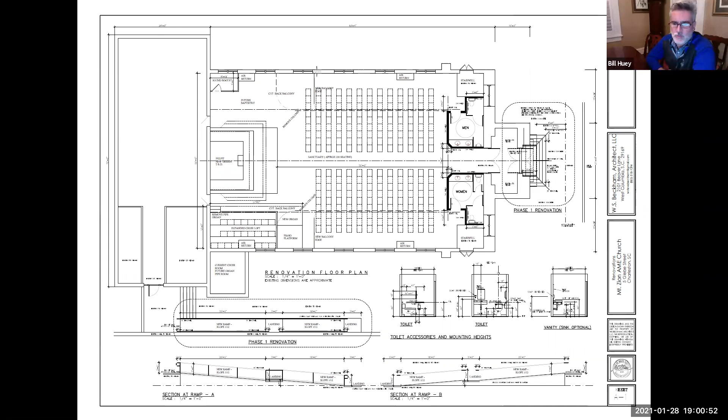This is Bill, I'll chime in. I agree with most all the comments that have been made. I just wanted to add, Glenn, there may be a secret storehouse of brownstone, as of at least a couple of years ago that we know about. I would suggest the applicant contact, I believe, Historic Charleston Foundation, which may have knowledge of that. Just throwing that out. If you're listening, I hope I didn't volunteer you for something you don't do.

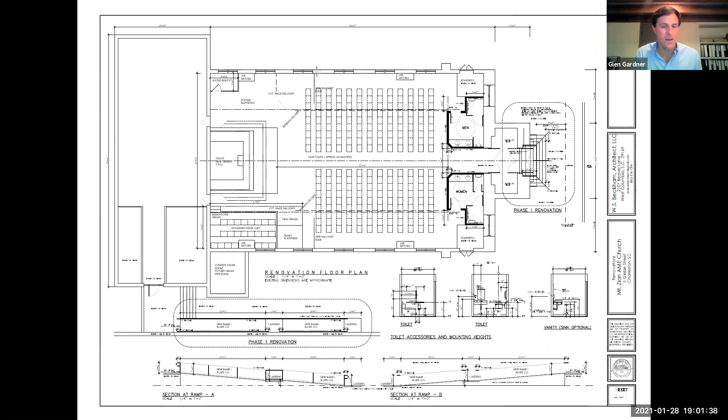That's all. Yeah, Bill, I'll confirm that was the case. I don't know, I know there were some issues with storage at one point, but I would think if the applicant reaches out to staff, staff could certainly put them in contact with Historic Charleston Foundation if any of that salvaged stone is still available.

This is HCF, this is April. We do have a lot of stone, so I'm happy to have Kim connect us. Awesome.

Kim, bear with me a minute here, I missed the answer to my question. If we approve this, we are approving the reverse of the swing of the front doors, is that correct? That is part of the proposal. If you approve it or deny it, that's up to you.

Oh yes, I know, I'm trying to get clarification as to exactly what's on the table. I understand the desire to reverse the swing of those doors as a safety feature. Of course, in-swing doors in a panic situation are certainly a long way from being ideal. However, there are significant historic churches in Charleston that still maintain their in-swing front doors. I do not object to a solution to that as a life safety issue, but I would like to see a better detail on how that's going to be accomplished.

Because it's going to require some serious intervention into the original jambs on the door. The doors, not so much, but certainly some, the original jambs on those doors is going to require significant intervention to reverse the swing. I would like to see some more detail on how that's going to be accomplished.

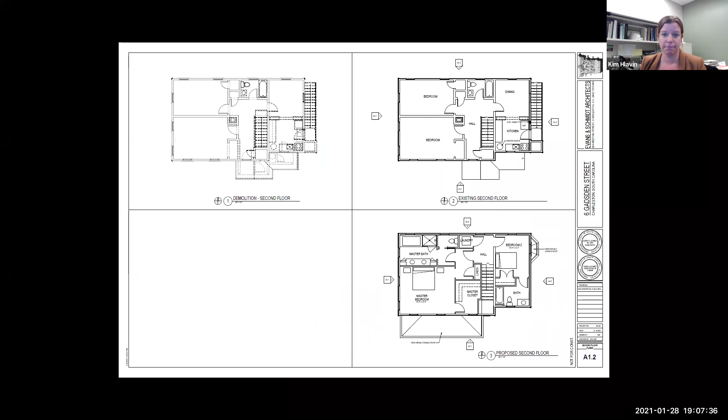Agenda item number 10, 29 Legare, is requesting conceptual approval for modifications to the north elevation, including new construction of a porte-cochere and an extension of the existing elevator tower. The building is Category 2 in the Charlestown neighborhood, circa 1835, and in the Old and Historic District.

And if you want to take it from here, Mr. Keyes, the floor is yours when you're ready.

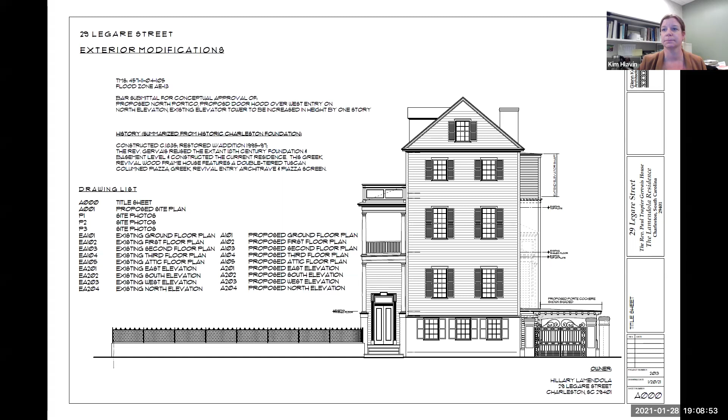Kim, can we go to the site plan, please? My name is Glenn Keyes, I'm the architect for the project. This is 29 Legare Street, which is a very large lot, as you can see, on the west side of Legare. It's a little bit unusual in that it has, of course, the piazza on the south side, but the driveway is on the north side. So the access for vehicular traffic and pedestrian traffic are a bit different. It's a challenge getting into the house, particularly in inclement weather.

The elevator is on the north side, and we're trying to propose a way to provide some covered entrance on that north side with a porte-cochere, which would sit back 27 feet from the property line. It's tucked in behind the iron gates, and there's a considerable historic masonry wall on the north side. Okay, if you can go to the next slide, please.

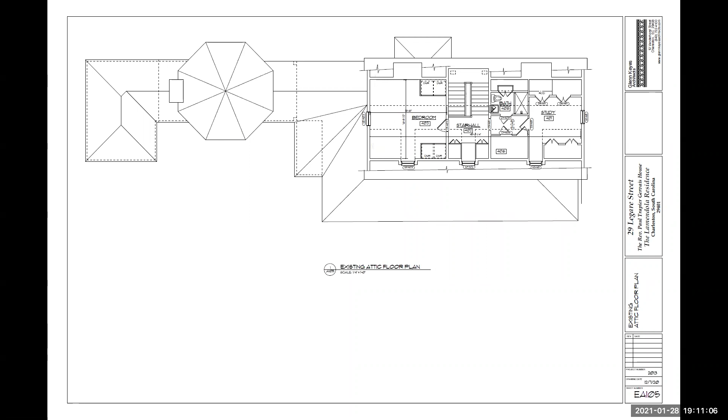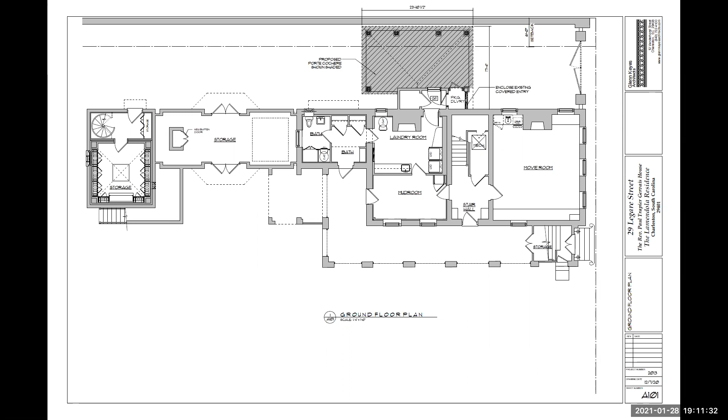And just an enlargement of the first floor plan. This is existing, so Kim, you can see the existing conditions. If you'll just scroll on to the proposed drawings, if you don't mind. So we have pushed the porte-cochere to the property line, to the garden wall. We did receive a variance from the BZA for that, and have met with the neighbor to the north, and they are supportive of our application. Next, please.

And then one more. So on the north side, we designed a low scale covered porte-cochere, which is designed to be lightly visible, more of a garden structure type design than something heavy like the building, trying to make its impact minimal. And the extension of the elevator, which was three stories, built in the 90s, we're just extending it up to the top floor. We're also proposing a small hood over the door to the far right.

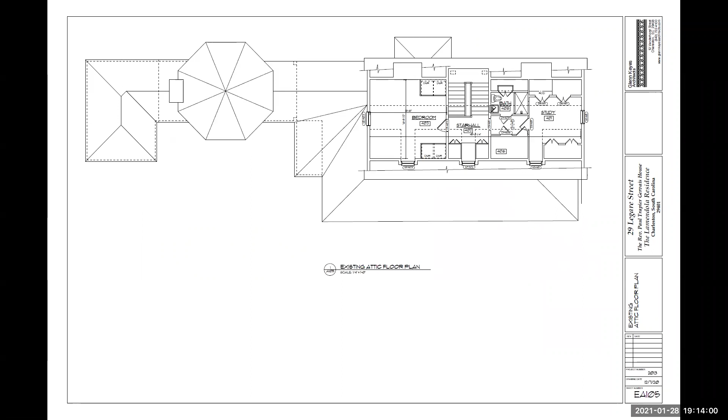Yeah, this is Bill. Glenn, regarding the porte-cochere material question, I guess, are those sort of emulating wood rafter tails or more of a pergola type detail? Is that all that woodwork to be painted, or is any of it wood, or what are the finishes? It is painted wood. As I said, more like a garden structure than a heavy building addition to that side.

That is really the back side of the building, the way it's oriented. That north side is where all the services are.

Because of the orientation of the building from the front, as you saw in the photographs, it's minimally visible. Certainly you can see it over the gates, but I think it's a very large building, and the small scale of that helps it to be minimized.

Glenn, Fillmore here. The roofing material on the porte cochere? We really haven't selected that yet, but I think flat lock copper would be the best solution. Okay, thank you.

And I'll just add on to that. So we can assume that the front elevation, which you would look at through the iron gates, is basically a mirror of the back elevation that we can see in that drawing. That is correct. Okay, all right.

And the materials of the columns and the bases? The bases would be masonry, and the columns would be wood. Thanks.

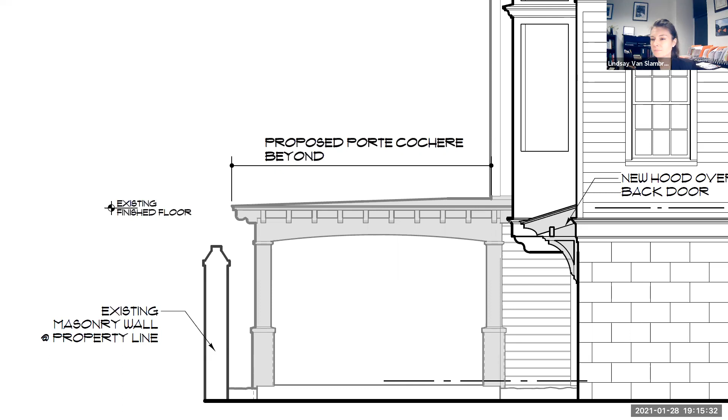Any more board questions? All right, let's move on to public comment. Kim, do we have any comments from the public?

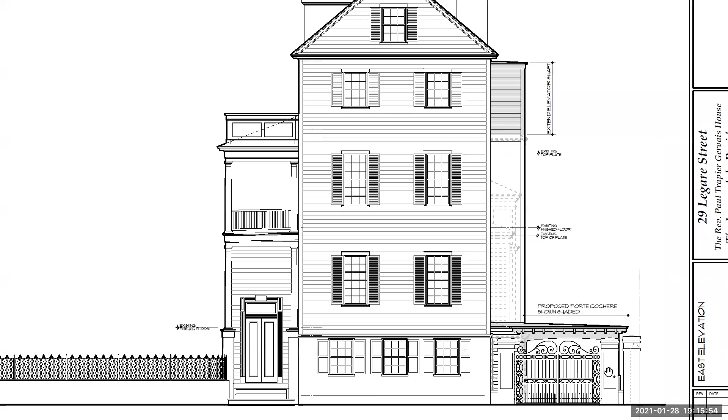We do. Anna Catherine Carroll, you've got the floor. Anna Catherine Carroll with the Preservation Society of Charleston. The Preservation Society is the exterior easement holder for this property and has conceptually approved the proposed scope of work, including construction of a new porte cochere and extension of the existing elevator tower as submitted. We look forward to continuing to work with the applicant through the review process. Thank you.

Now on to staff comments and recommendations. The porte cochere is reversible and does not affect the historic fabric of the building, and staff are supportive. Utilitarian elements are simply detailed and respect the historic building. The elevator tower seems logical and respectful as well. Staff is recommending conceptual approval with final details to staff. Thank you, Kim.

Mr. Keyes, now that we've heard public comment and staff comment, is there anything you want to clarify or respond to? No, I think we're fine. Thank you, Mr. Keyes. We will move into board discussion.

This is Bill, I'll go ahead and start. Kim, can you get us one of those blow ups of the porte cochere? There you go, thank you. That one was good, okay, that was good too.

Really, I think my only comment is I'm wondering about the depth of the arched element there, especially as it corners out over the columns, which is pretty deep. What it's giving me the impression of, seeing it all painted up together, is it almost reads like a cornice to me, maybe bridging over from a landscape-looking pergola type element. That would be a concern because it starts to have what appears to be a lot more detail on this little element than the house itself.

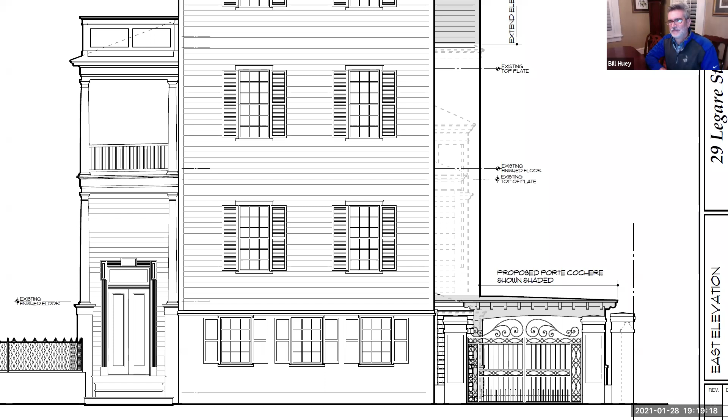Okay, I'll float one if it's okay. I want to make a motion for conceptual approval with staff's comments and a board comment to try to lighten the appearance of the porte cochere entablature system to read more like a landscape type pergola, and final details to staff.

I have a motion for conceptual approval with staff comments and an added board comment to lighten the appearance of the porte cochere and entablature system to read like a landscape pergola. Do I have a second? Bill, did I accurately convey your board comment? Yes, you got it, thank you.

And did any other board members have other comments to add to the motion? Hearing none, do we have a second? Glenn, you look like you want a second. Okay, I'll second it. Julia?